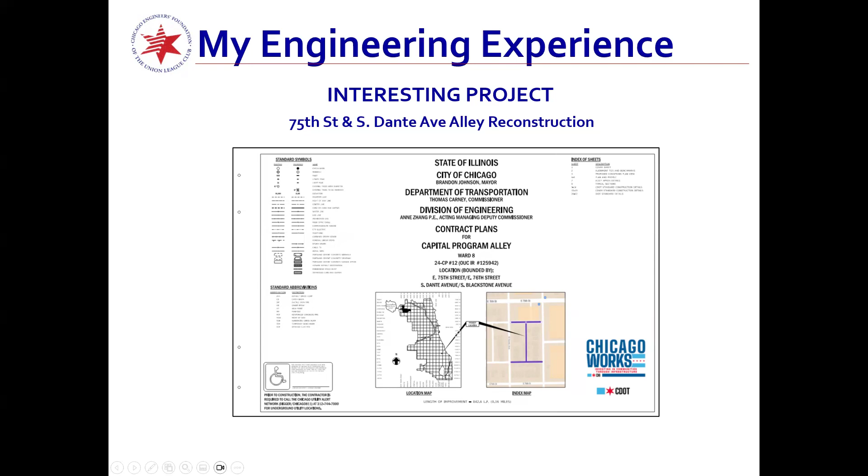So I'll just continue, I'll be quick. I wanted to show you guys an interesting project that I've worked on. This is a cover sheet for an alley reconstruction project. Instead of just going over the project on the PowerPoint, I wanted to show you guys what it looks like as I design it. Can you guys still see my screen?

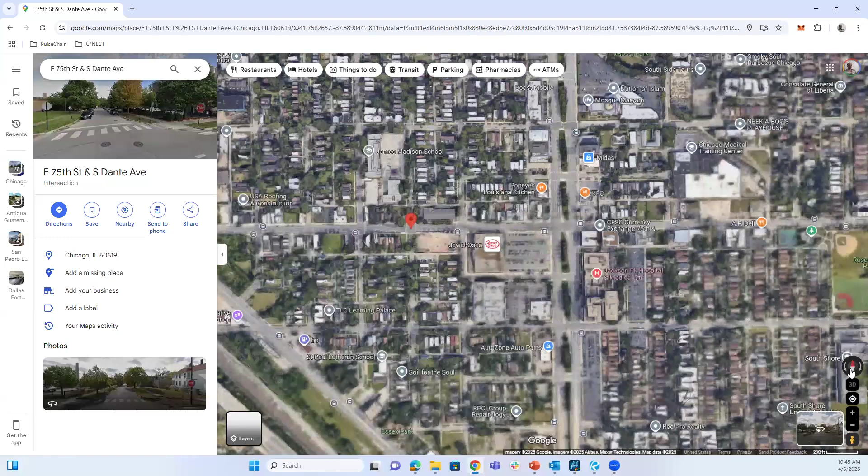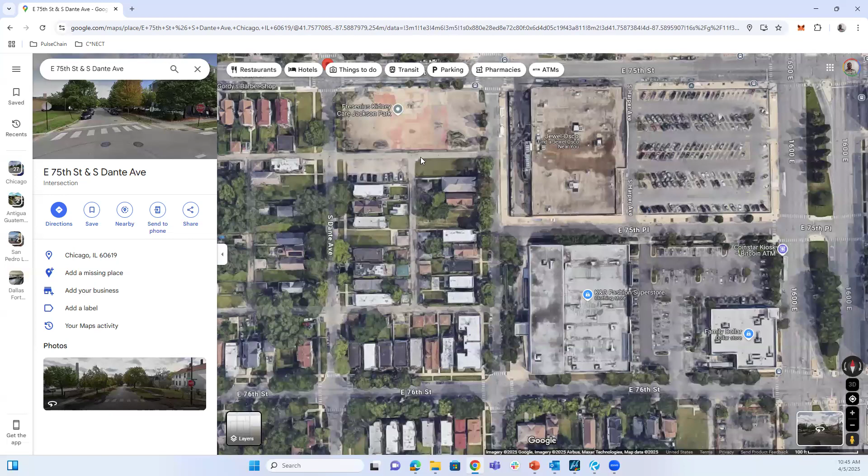Yeah, okay, so this is a quick Google Maps image of the alley - this is Chicago, map of Chicago. And we just zoom in to our street, or my corridor that I'm currently working on. This is what we call an H-shape alley, but our scope is complete reconstruction.

So we're gonna remove all the concrete and put new pavement in. We're gonna upgrade the alley aprons - that's what we call them, maybe you guys call it something else, I don't know. It's just an entrance to the alley.

But our scope also includes sidewalk improvements, and what we have to do is determine if they're compliant. Compliant means it's not too steep for people.

It's not too steep for just an average person walking, but also another term is ADA compliant, and that's more related to anybody in a wheelchair, anybody who needs a little bit more assistance, and it has to be compliant for that as well.

The sidewalk and drainage, you probably won't see that, but see on this image, we have these called manholes. There are also other types called catch basins. The difference between a manhole and a catch basin is a manhole is just meant to hold the water. There's a big pipe underneath, and I'll show you a profile view of it later. The manhole is meant to hold the water. A catch basin is meant to take in the water.

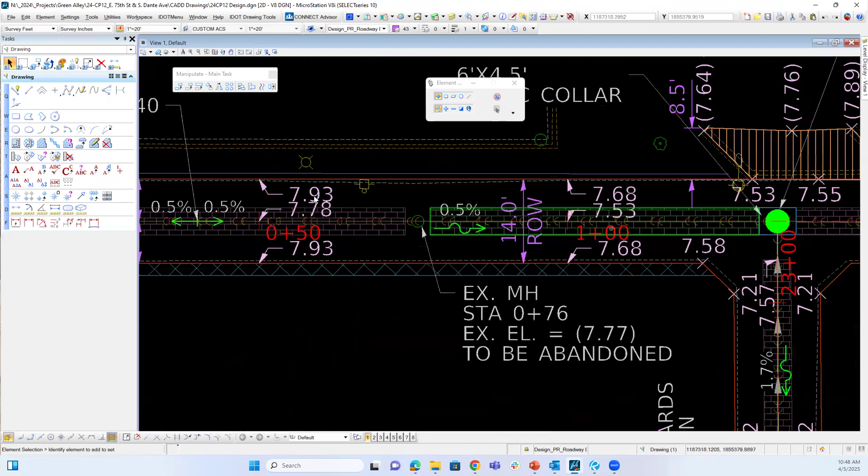And what we use to design, and we'll look at this, what we use to design is Microstation, and I kind of mentioned that earlier, but this is the tool called Microstation. And if you guys remember what the alley looked like, I said it's an H-shaped alley, but in our design, this is what it looks like.

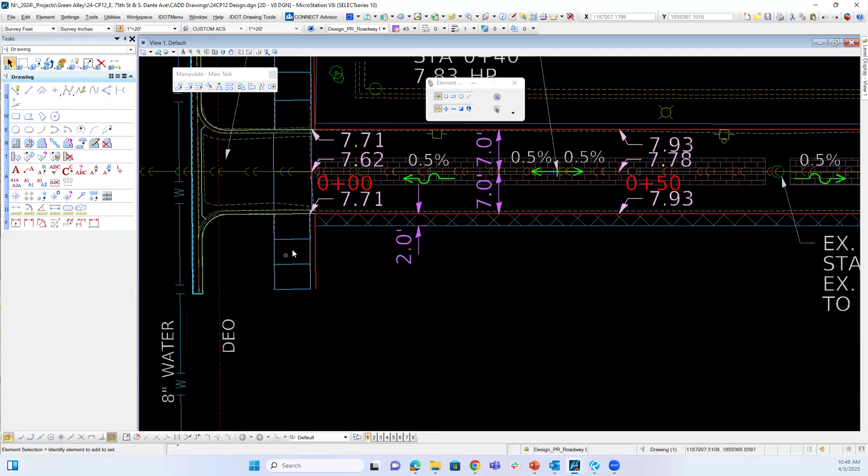And just quickly, these are the design plans. This is how we go through and plan out the alley aprons. All these boxes are the squares that you saw in the Google Maps for the ramps, and all of them need to be compliant.

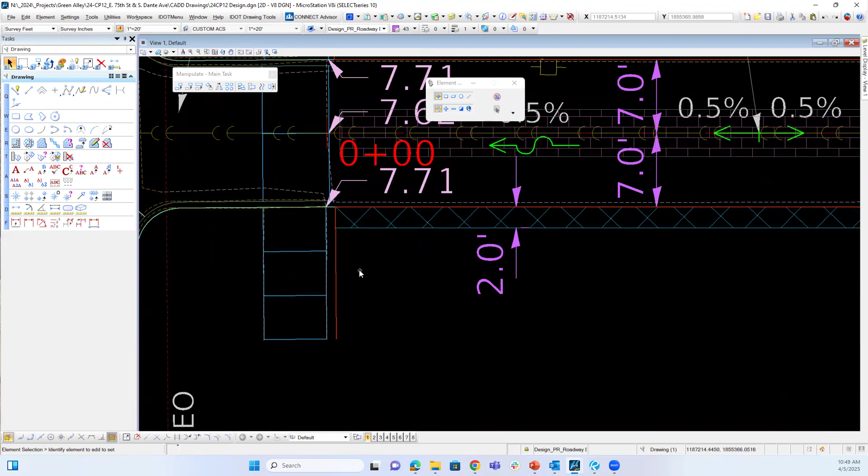You can't see on this image, but there are slopes that we have to consider, that we have to show. There's a minimum maximum that we have to maintain, a maximum of 1.5% crossing all the way through. And all these different aspects of the apron have different standards, and I'm definitely not gonna go through all that with you guys.

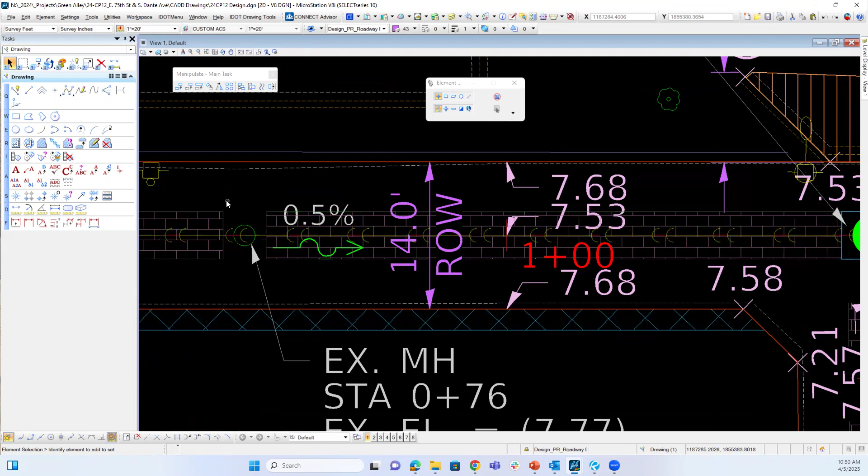It'll take forever. But in this project, we're gonna be adding what we call pavers. Maybe you guys can imagine that if you ever see an alley with low bricks in the middle, brick pavers in the middle—that's what those are. We're adding pavers, and it just kind of goes in.

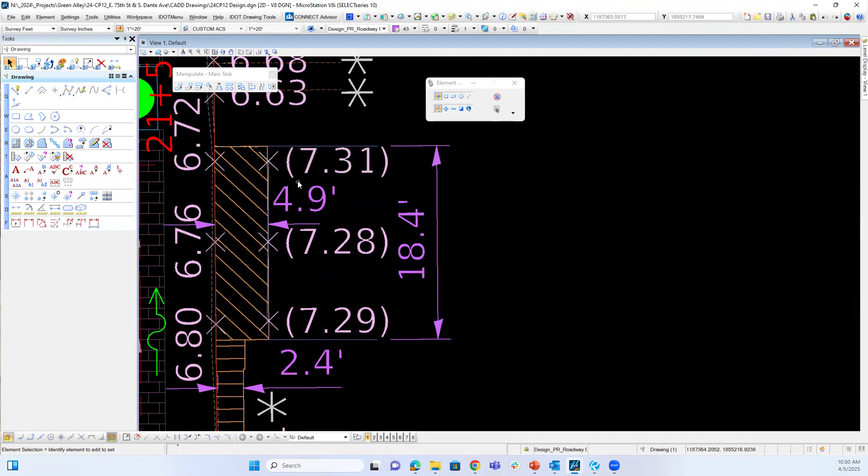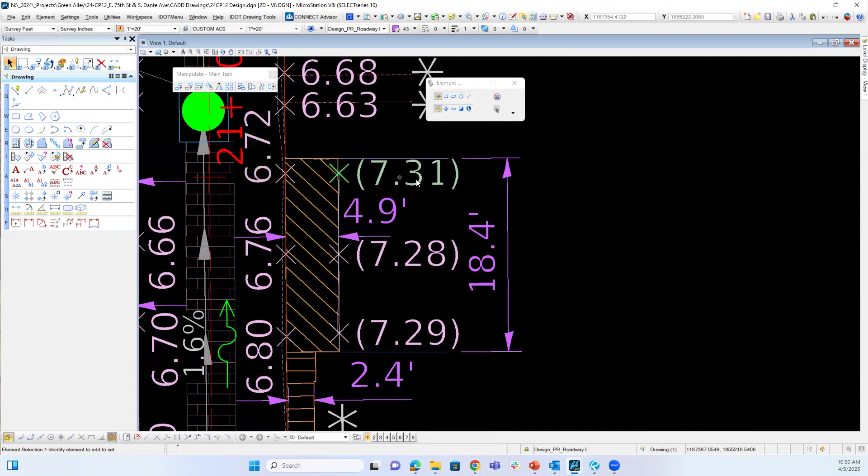You see dimensions everywhere, all the dimensions of the garages, and these points right here are the elevations. The ones with the bracket on them are the existing elevation, and the ones without are the proposed elevations. Like I mentioned earlier, we have to make sure that water is flowing away from the garage, so the proposed elevation has to be less than the existing elevation. You can see here 6.72, the existing 7.31, so we know water is flowing in that direction towards the middle.

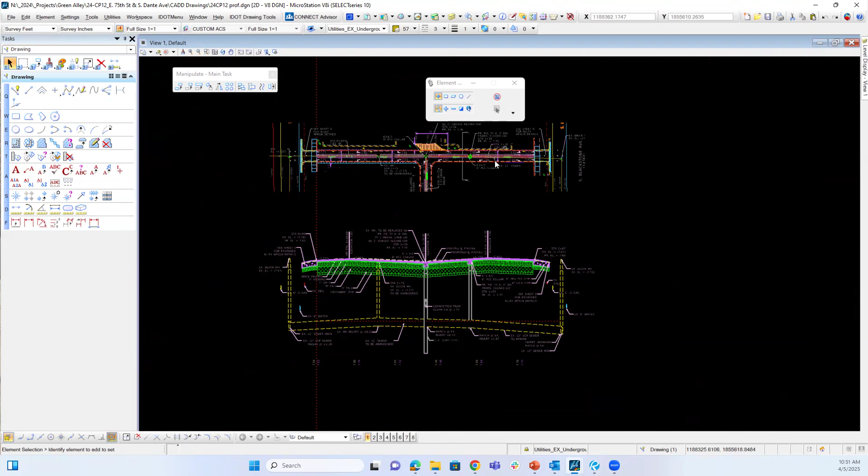Am I confusing anybody? I'm speaking really fast. No, you're good. I was just, sorry to cut you off.